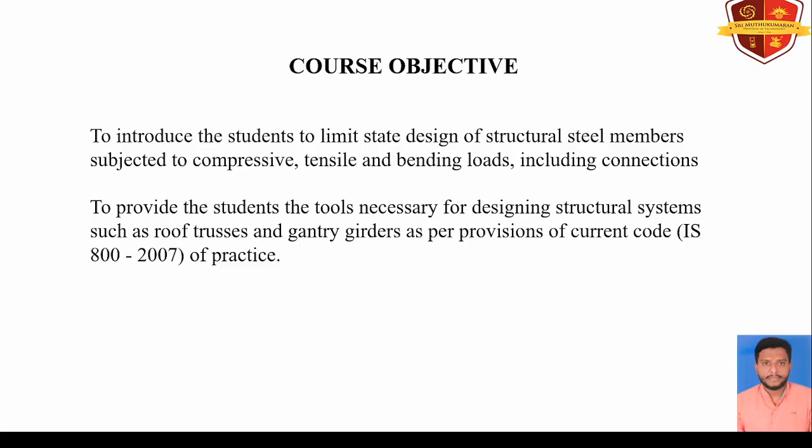Next we can see the course objective of this subject. To introduce the students to limit state design of structural steel members subjected to compressive, tensile and bending loads including connections. To provide the students the tools necessary for designing structural systems such as roof trusses and gantry girder as per provision of current code IS 800-2007 of practice.

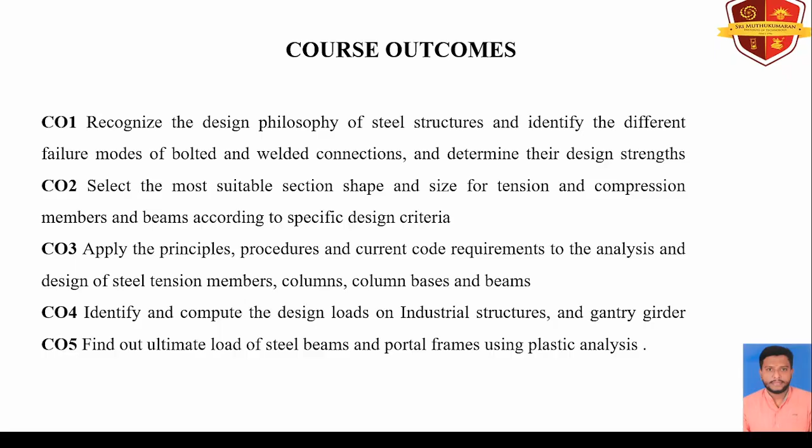Apply the principles, procedures and current code requirement to the analysis and design of steel tension members, columns, column bases and beams. Identify and compute the design loads on industrial structures and gantry girder. Find out ultimate load of steel beams and the portal frames using plastic analysis. At the end of the course, students can able to understand these 5 course outcomes from this subject.

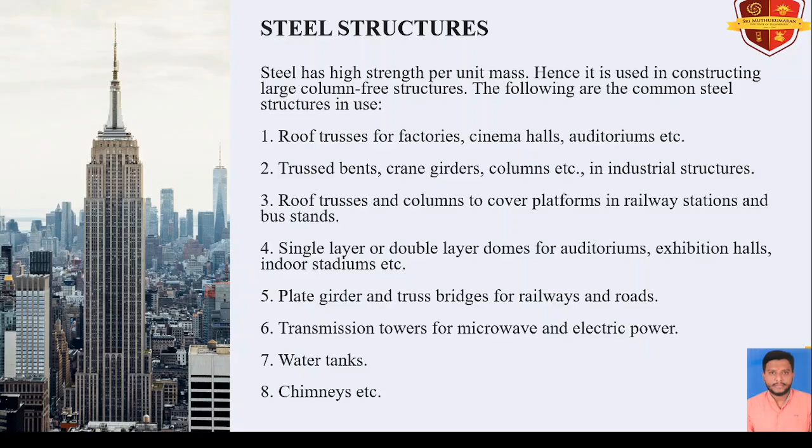Unit 1. Introduction to structural steel and design of connections. Steel structures. Steel has high strength per unit mass. Where can it be used? It is used as roof trusses for factories, cinema halls, auditorium, trussed bent crane girders, roof trusses, plate girder, truss bridges for railways and roads, transmission tower for microwave and electric power, water tanks and chimneys.

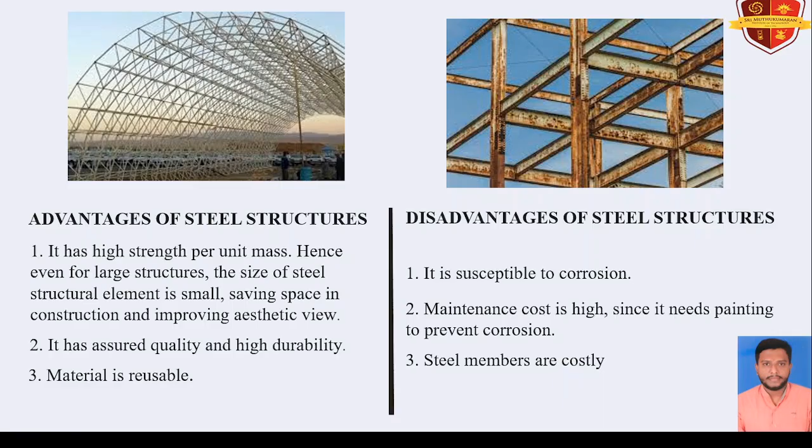The main advantage of steel structures is it has high strength per unit mass compared to RCC structure. The size of steel structural element is small, saving space in construction and improving aesthetic view. It has assured quality and high durability. Material is reusable. Disadvantages of steel structures. The main drawback of steel elements is corrosion, and also it is very costly. Maintenance cost is high since it needs painting to prevent corrosion.

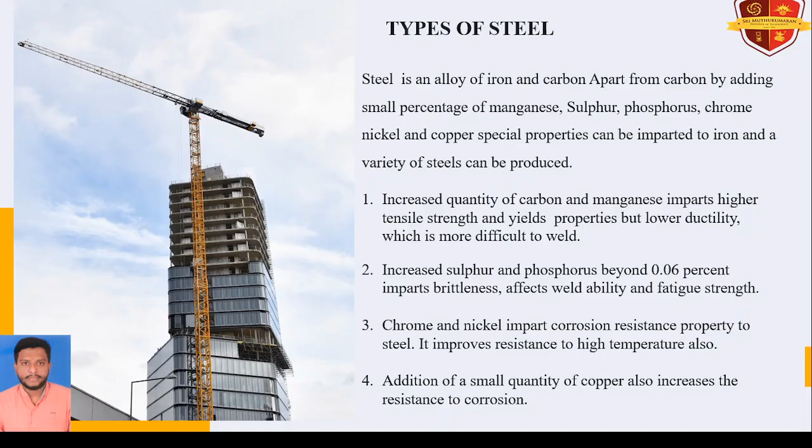Types of steel. Steel is an alloy of iron and carbon. Apart from carbon, by adding small percentage of manganese, sulfur, phosphorus, chrome, nickel and copper we get special properties. Increased quantity of carbon and manganese imparts higher tensile strength and yield properties but lower ductility. Increased sulfur and phosphorus beyond 0.06% gives brittleness and affects weldability. Chrome and nickel impart corrosion resistance property to steel. Addition of a small quantity of copper also increases the resistance to corrosion.

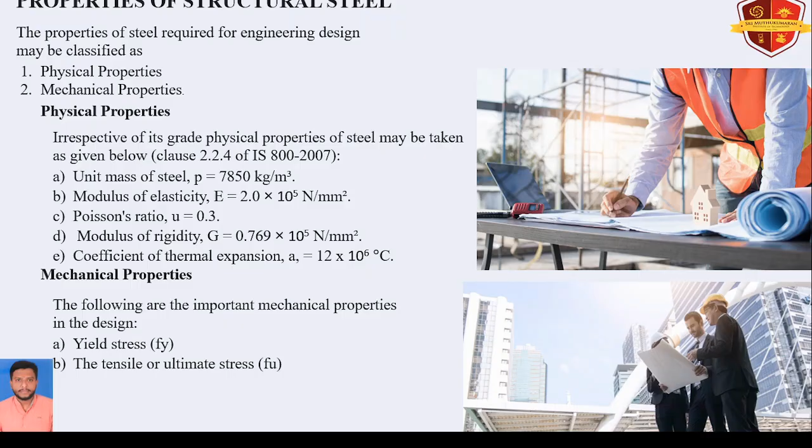Next we see the mechanical properties. First one is yield stress. It is nothing but Fy. Next one is ultimate stress. It is nothing but Fu. Fe 415: the 415 denotes Fy.

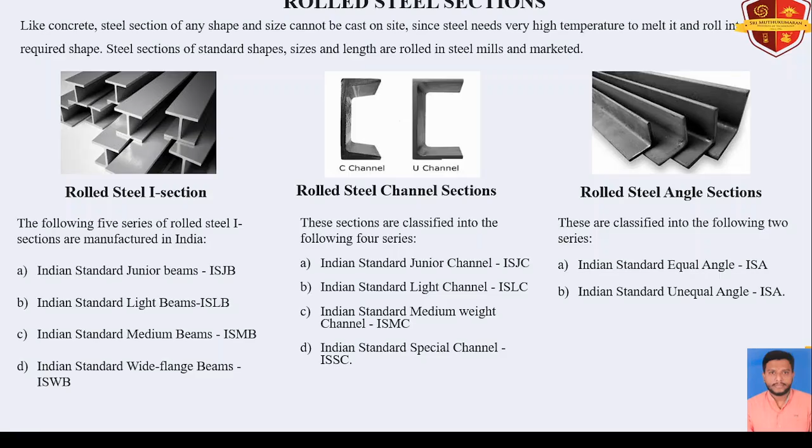Rolled steel section. Steel is an alloy of iron, but we can use the steel in market by rolling the steel. It gives various types: I section, channel section, angle section. The marketably available I sections are Indian Standard Junior Beams, Indian Standard Light Beams, Indian Standard Medium Beams, Indian Standard Wide Flange Beams. Likewise, for channel section, Indian Standard Junior Channel, Indian Standard Light Channel, Indian Standard Medium Weight Channel, Indian Standard Special Channel. For rolled steel angles, Indian Standard Equal Angle, Indian Standard Unequal Angle. These are the varieties available in market.

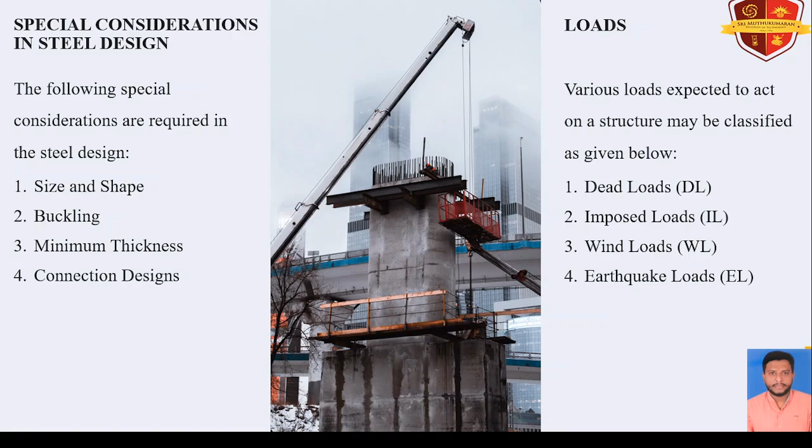What we have to consider before designing the steel is size and shape, buckling, minimum thickness, and connection designs. We have to pre-calculate the loads before designing the steel, that is dead loads, imposed load, wind load, and earthquake load.

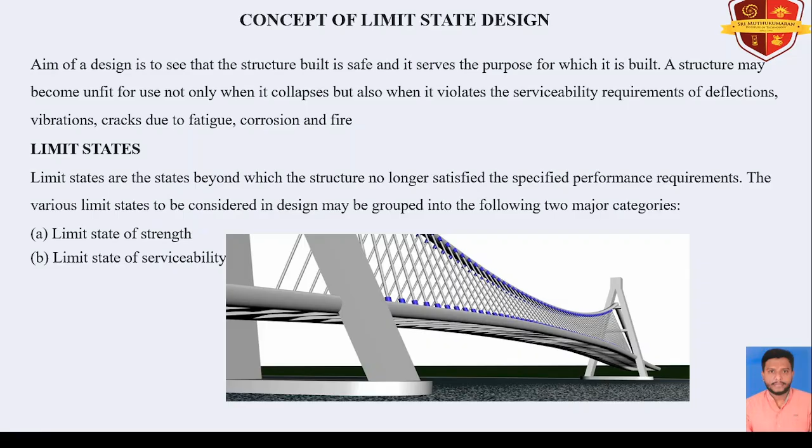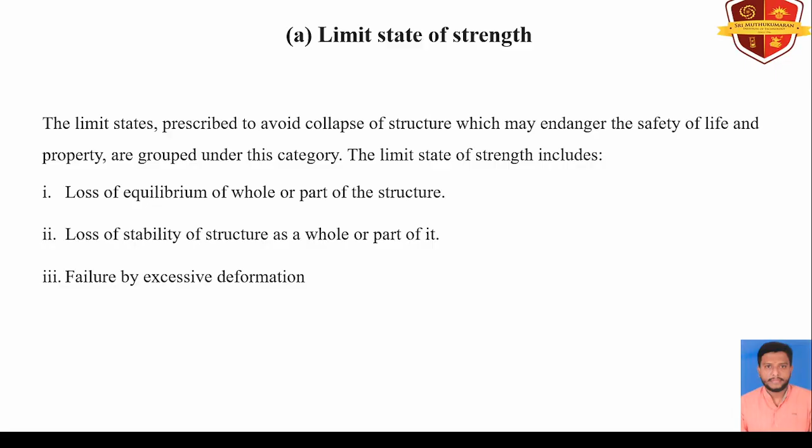The concept behind structural steel is, first, limit state design. Two types of design are available. One is limit state of strength, another one is limit state of serviceability. Limit state of strength includes loss of equilibrium of the whole or part of the structure, loss of stability of the structure, and failure by excessive deformation.

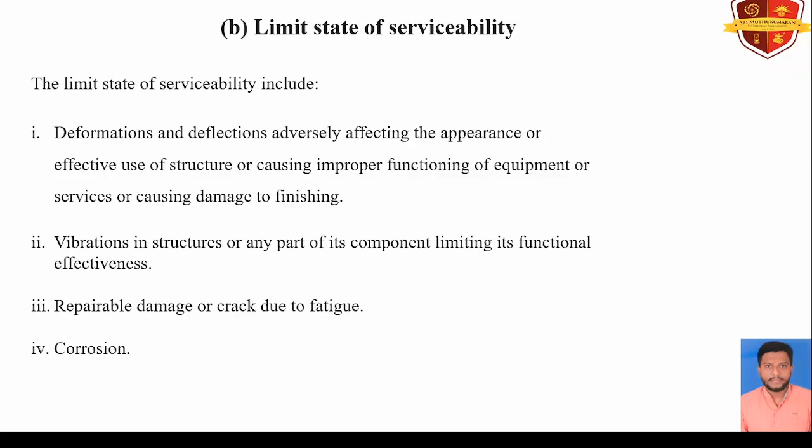Next one is limit state of serviceability. It includes deformation and deflection adversely affecting the appearance or effective use of the structure, vibration in structures or any part of its components limiting its functional effectiveness, and repairable damage or cracks due to fatigue and corrosion.

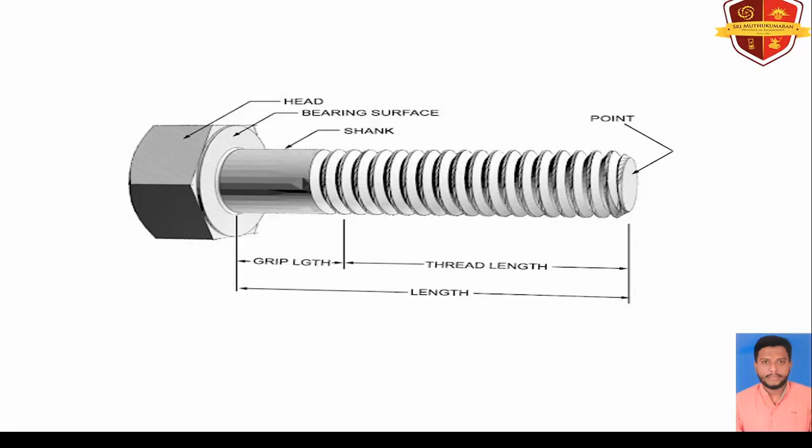This image shows the bolt. The top portion of the bolt is the head. The middle portion of the bolt is the shank. The end portion of it is the thread. Bolted connection: there are two connections available in steel structures. One is bolted, another one is welded. First we are going to see the bolted.

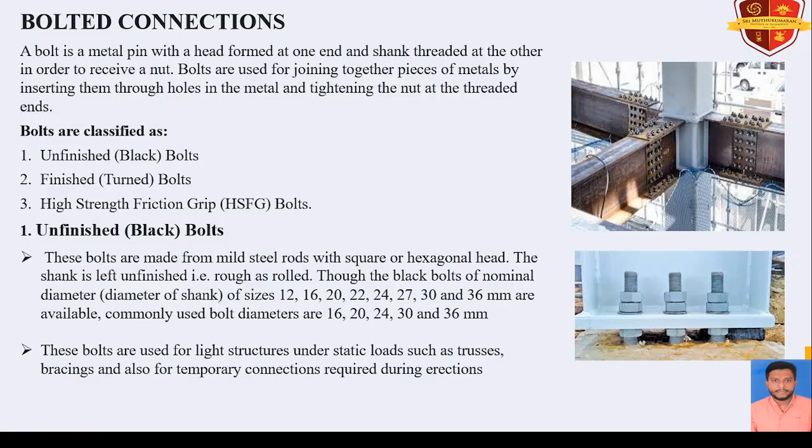Types of bolts are unfinished bolt, finished bolt, and high strength friction grip bolt. The unfinished bolt is made from mild steel rods. The diameters of unfinished bolts are 12 mm, 16 mm, 20 mm, 22 mm, 24 mm, 27 mm, 30 mm. These bolts are used for light structures. Next we can see the finished bolt. These bolts are also made from mild steel, but in hexagonal shape. As usual, the bolt hole is kept 1.5 mm larger than the nominal diameter for this bolt.

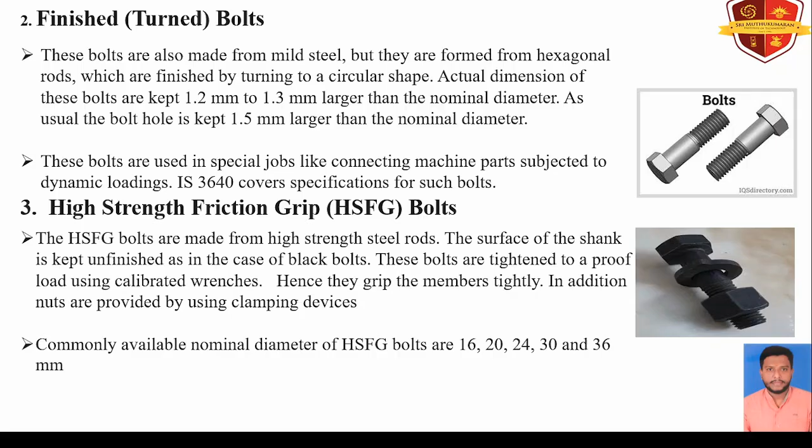Next we can see the high strength friction grip bolt. High strength friction grip bolts are made from high strength steel rods. They are not made from mild steel, they are made from high strength steel. Commonly available nominal diameters of HSFG bolt, HSFG being high strength friction grip bolt, are 16 mm, 20 mm, 24 mm, 30 mm and 36 mm.

Advantages of bolted connection compared to welded connection. First one is making the joint is noiseless. It does not need skilled labor. It needs less labor. Connections can be made quickly. The structure can be put to use immediately. Alterations, if any, can be done easily. Working area required in the field is less.

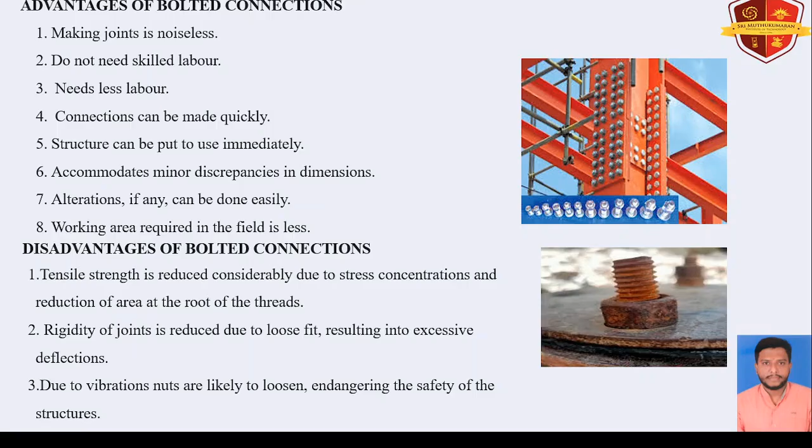Then what are the drawbacks of bolted connection? Tensile strength is reduced considerably due to stress concentration and reduction of area at the root of the thread. Due to vibrations, the nuts may be loosened. It will affect the strength of the structures.

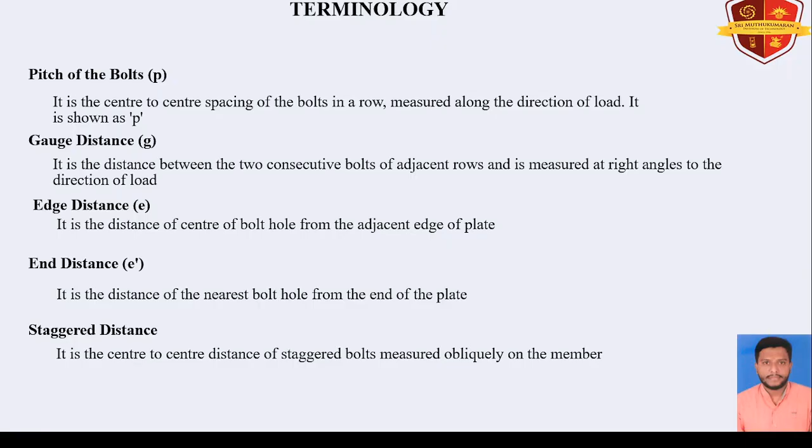The important terminology in steel structures is, first, pitch of the bolt. It is measured along the direction of load. Then gauge distance, it is measured at right angles to the load. Next, edge distance, it is the distance of the center of the bolt from the adjacent edge of the plate. Next one is end distance, it is the distance of the nearest bolt hole from the end of the plate. Next one is staggered distance, it is the center to center distance of staggered bolts measured obliquely on the member.

Students, I hope everyone understands the introduction of steel engineering. Thank you.